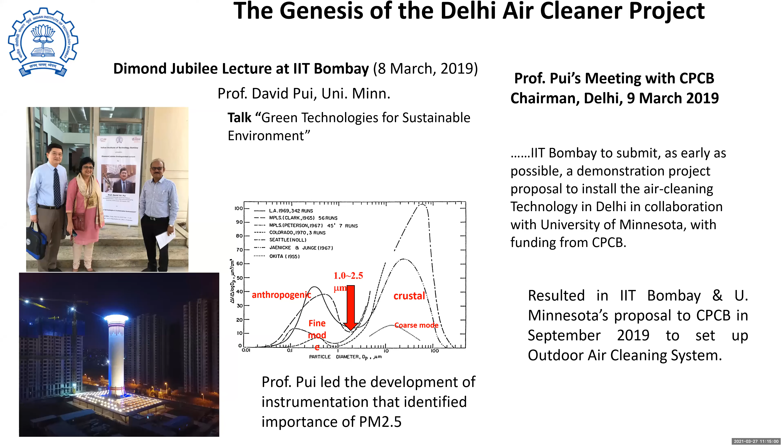To understand how this project actually came about: it started in March 2019 when IIT Bombay invited Professor David Pui of University of Minnesota. He is a long time worker in the area of aerosols and fine particles, and one of the co-founders of the particle sizing instrument, which resulted in the concept of PM 2.5. He gave a lecture on green technologies for sustainable environment, having been the architect of the tower set up in China, the Xi'an Tower, a 60-meter high tower in the city of Xi'an, which was published in journals.

This initiation led to our interaction with them and the setting up of the tower. After his presentation, he met the chief of Central Pollution Control Board, where it was indicated that IIT Bombay and Minnesota should go ahead and set up a proposal for examining the feasibility of setting up a tower in Delhi.

The basic rationale for it comes from the deteriorating air quality in our Indian cities. In fact, it is said that 49 of the 50 most polluted cities are in Asia. If you see the pollution level in Delhi over the past few years, even the annual average has been well above, a factor of 2 more than the annual permissible limit.

There is, of course, a very big Indian indoor pollution problem, which we are not addressing here because it comes under a separate category of strategies and technologies. A typical rural Indian household is full of smoke, and this also has to be addressed as part of improving the health conditions of the population.

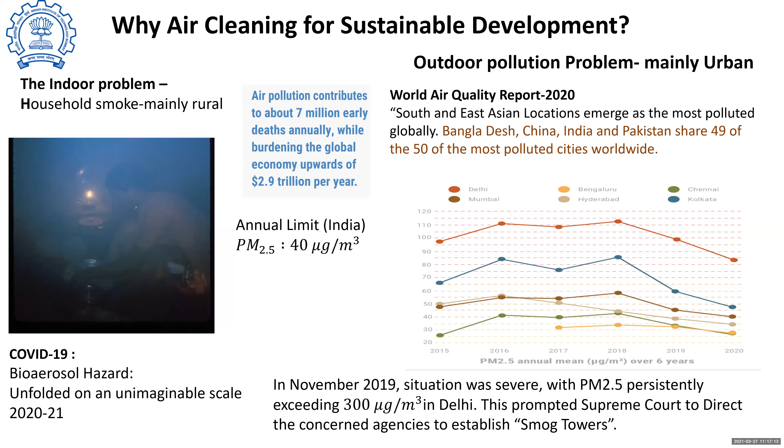It was in 2019 when the Delhi pollution was severe. The Supreme Court was seized with the issue, and directed the concerned agencies to establish smog towers, based on the proposal made by IIT Bombay. It was at that point that this project took off, and a team was formed. Tata Projects Limited agreed to be part of this project for installing the tower, and underwent several discussions with the University of Minnesota, and a final proposal was put up.

So in summary, this collaboration has resulted in a project which introduces outdoor air cleaning as a concept in India for the first time. It's a paradigm shifting concept. However, we must have a perspective that this is not for cleaning the cities - cleaning the city is a different concept. This is to create clean air zones in areas where people confluence, where there is a large density of population.

The choice of the facility is in terms of scale and type. It's a medium scale PM 2.5 removal device based on a tower of 20 meters height. It uses the principle of filtration driven by fans, with a clean air delivery rate of the order of 1,000 meter cube per second. It is a multi-institutional collaboration involving Tata Projects, IIT Bombay, IIT Delhi, University of Minnesota, funded by Central Pollution Control Board as well as the Delhi Pollution Control Committee.

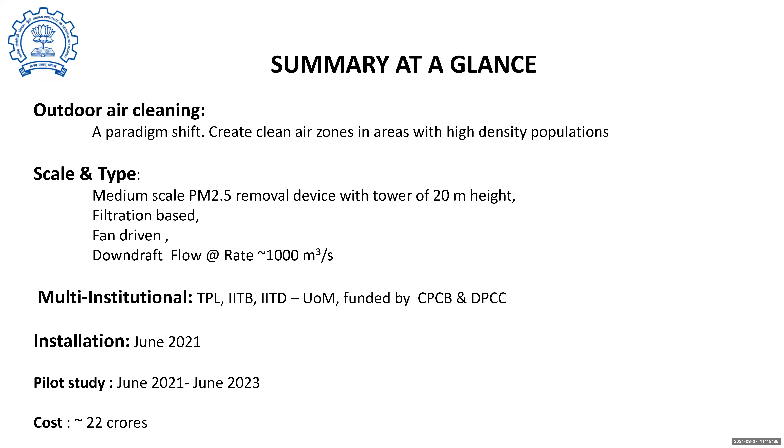It is expected to be installed by June 2021. After that, a pilot study of its impact will be conducted by IIT Bombay between June 2021 and June 2023, at a cost of approximately 22 crores.

Now, why concern for PM 2.5? PM 2.5 is basically particulate mass concentration contained in sizes below 2.5 micrometers. It is not particles of size 2.5, but all particles below 2.5, because the anthropogenic aerosols or pollutants created cover a very wide spectrum.

And why importance on this 2.5? Well, 2.5 is approximately a size below which a large fraction of the aerosols deposit in the lung. Its clinical, physical reason is the lung deposition model, shown here, where there is a peaking of deposition in the alveolar and tracheobronchial region at 2.5 micrometers and below.

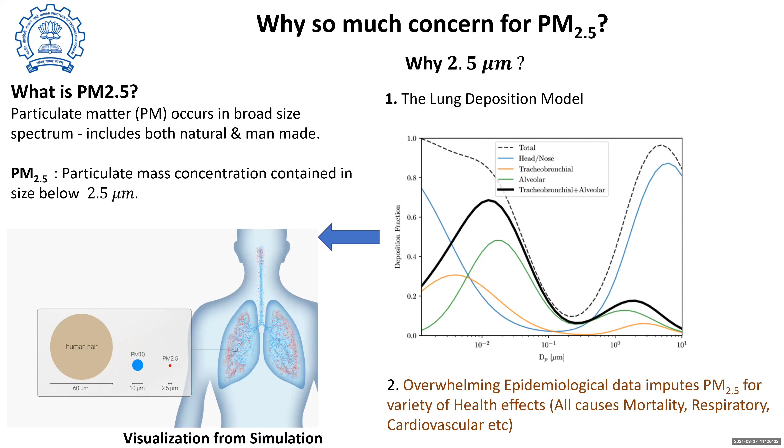That is one reason. And the second reason is the fact that there exists overwhelming epidemiological data which imputes PM 2.5, and not larger particles, for a variety of health effects. And this is a very strong and compelling reason for regulating and controlling PM 2.5.

As seen in this figure, you can see the red dots are PM 2.5 particles. This is a simulation result which shows predominant deposition occurs in the pulmonary region.

However, where do air cleaning systems stand among the various control strategies one should adopt? If you look at the ultimate solution, it is actually source and emission control and regulatory enforcement and compliance. However, such regulations may take a long time, especially in countries like India. So there must be some alternative mix of strategies as techno paradigms.

And this is where large-scale technologies could be introduced as a concept, as specific solutions for severity reduction among a mixed bag of portfolio of strategies. This is not the only strategy, but should be explored necessarily.

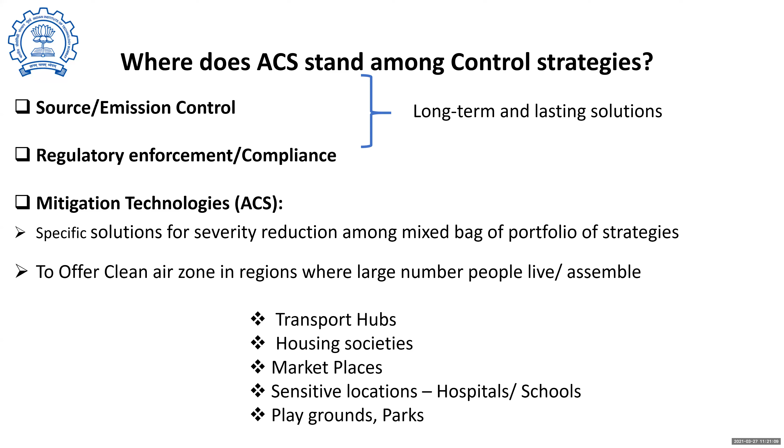And to offer clean air zones in regions where large numbers of people live or assemble, such as transport hubs, housing societies, marketplaces, sensitive locations involving hospitals and schools, playgrounds, parks, you can actually optimize the places where one would like to deploy such large-scale technologies.

So what are the concepts or principles which you use? Generally,

particles have very different removal mechanisms as compared to gases. Simple exchange of science doesn't work. It involves various principles such as inertial impaction, governed by Stokes number, diffusion governed by Schmidt number, gravitational sedimentation, interception, and artificially induced electrical attraction.

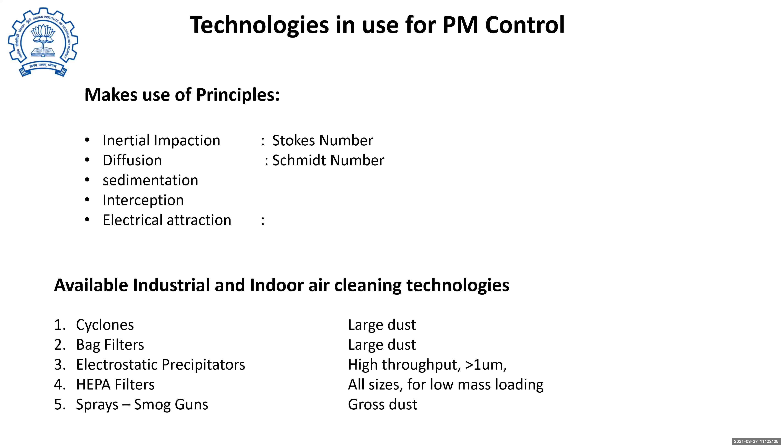And all these principles are utilized in existing industrial units such as cyclones, bag filters, electrostatic precipitators, the well-known high-efficiency particulate air, that is HEPA filtration system, and also sprays and smog guns. And they have different ranges and different concentrations at which they are useful.

However, HEPA filter is one system which is useful across all size ranges. And that is why filtration is a guarantor of removal, whereas others have ranges.

And a filtration system can be so designed that its least efficient collection efficiency itself can be made more than 99%. This is achieved by a combination of the matrix as well as the geometrical arrangement, such as pleating

of the filters. The figure on the right side shows the amount of dust collected, for example, in the Xi'an Tower. It can hold very large dust capacities.

And the figure shows the collection efficiency graph. This is typical, where the lowest efficiency can be more than 90%, for example.

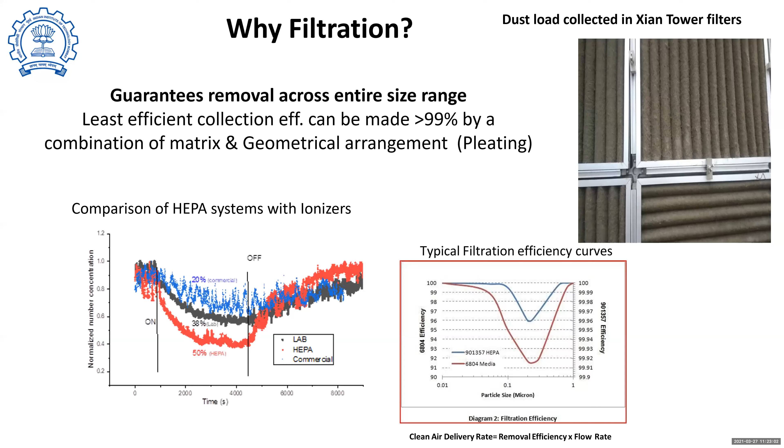And if you compare the various air cleaner technologies, indoor technologies, you can see from the red plot here that the filter-based systems always work the best and they have the highest removal rates.

In addition to the conventional filter, one can impart electrostatic charges at the stage of manufacturing of the filter fibers. These are called charged fiber filters, specially designed. They have a very high dust holding capacity.

When we say it is of MERV 14, MERV is the minimum efficiency reporting value, and a rating of 14 is actually an index. Higher the number, more efficient it is. So MERV 14 is typically useful in all indoor air cleaning devices.

And the kind of filters that one would require for an outdoor air cleaner is phenomenal. You need about 9,600 filters for a medium scale device, covering an area of 16,000 meters square by pleating, and it can hold up to about 80 or even more grams per meter square dust capacity.

You see, they are extremely porous. Unlike water filters, they are only 7% solidity, but still they collect with more than 90% efficiency.

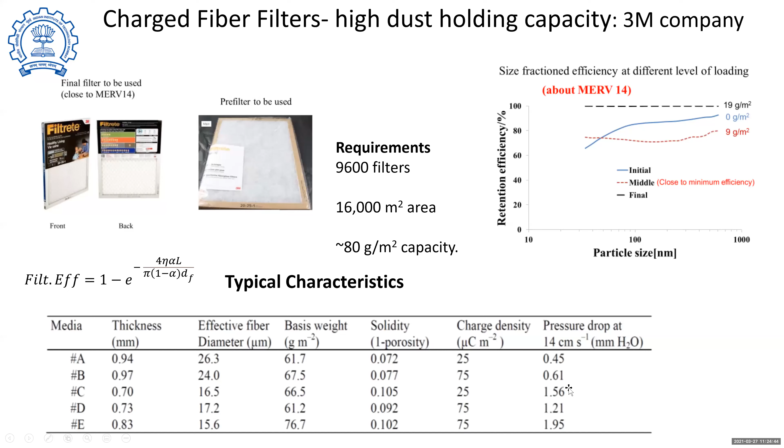And most importantly, they're very, very low pressure drop systems because of the high porosity, and they have less than a millimeter level of water pressure drop under typical operating conditions.

Now, having introduced the filters as the mechanism of trapping particles, one has to consider several factors for scaling and the type of air cleaner required.

There are questions like the Xi'an tower, which is considered an updraft unit where air is released at the top. So whether we should go for updraft versus downdraft, we should note that top release will not be effective in the vicinity of air cleaner systems. So in populous cities where one would first like to clean the areas around the tower, this may not be very useful.

Also it is difficult to evaluate the performance as the estimate of its range is very difficult. Considering all this, an option was made to choose the downdraft with ground level release systems.

Then there is a question of the energy that will drive the flows, whether solar energy buoyancy driven versus fan driven. The Xi'an unit is actually solar energy driven, so there is no cost of operation. However, the buoyancy driven system, while energy efficient, is highly uncertain, especially during winter or night times when you need to drive significant air flow, then it may not be operating at all.

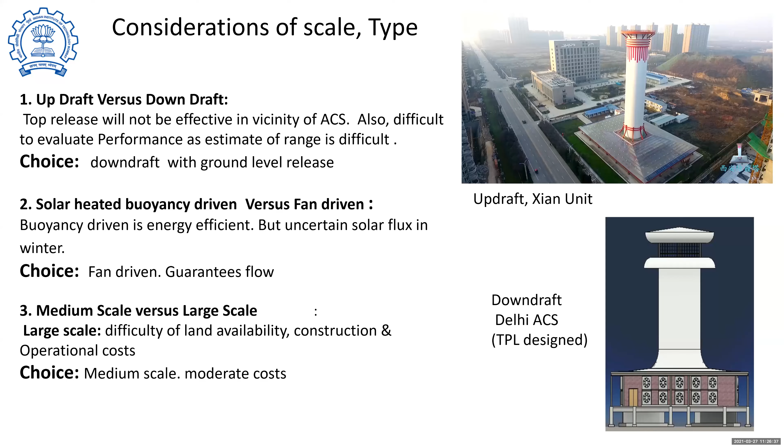So to be very definite, as a first venture, it was decided to go for fan driven systems because it guarantees flow. Then there's the question of scale, whether medium or large, considering the difficulty of land availability, construction and operational costs. Being a first-time venture, it was decided to go for a medium scale at moderate costs. The figure at the bottom is the TPL designed tower that is going to be installed. Much more you will hear from TPL itself on this tower.

Now, how do we measure or rate an air cleaner? How do we say this air cleaner is relatively better, as per design, compared to another? The quantity of technical importance is called the Clean Air Delivery Rate, which has the unit of flow rate, meter cube per hour.

However, it is not just the flow rate. It is the product of the air flow rate and the particulate matter removal efficiency. This concept was developed by the Association of Home Appliance Manufacturers, basically to qualify indoor air purifiers. We believe the same concept is applicable and useful even for outdoor air purifiers. So when somebody says he has a technology for outdoor air cleaning, the first question one should ask is, what is your CADR? If particle removal efficiency is 0, even if you have very high flow, it's not effective, so the CADR is said to be 0.

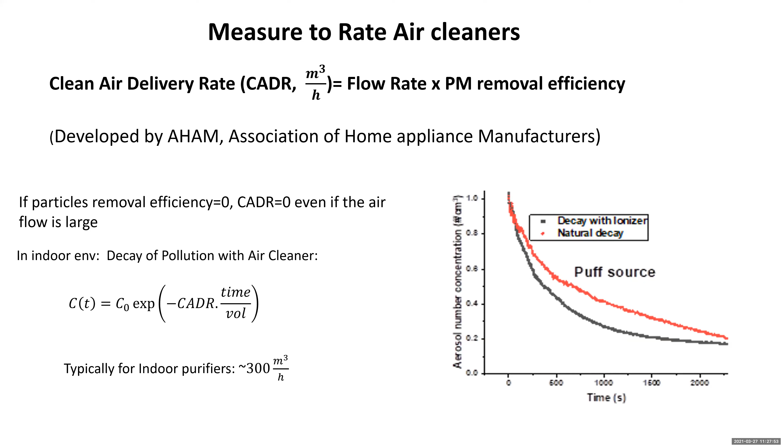CADR has an application in the indoor concept because it is actually the rate constant of decay. So if you estimate the rate constant experimentally, you can determine the CADR from the decay characteristics. However, in the outdoor concept, it cannot be done this way. You have to calculate it by multiplying the flow rate by the intrinsic efficiency. Typically, indoor air purifiers have a low CADR, about 300 meter cube per hour, which is very small compared to what we would require for outdoor use.

So how do we decide what level of outdoor air CADR is required? For this, we did a certain level of first principle simulation on an idealized terrain, just to get an estimate. You can model airflow in the outer environment by considering dispersion and fluid flow as a simple flow, without actually using the Navier-Stokes equation. One can get certain solutions by dispersion theory.

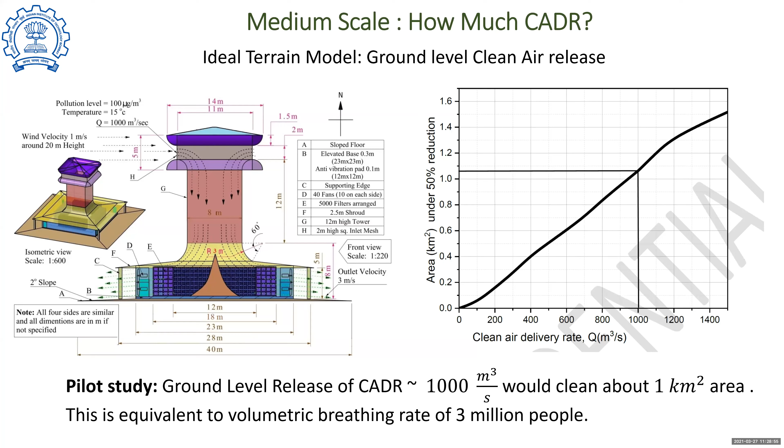That estimate was used, which says that if you go for a medium scale area of about 1 kilometer square for cleaning, you would need a clean air delivery rate of the order of 1,000 meter cube per second. This is actually the underlying reason one chooses a flow of the order of 1,000 meter cube per second at a collection or removal efficiency of about 90% or so. So the tower was designed with those parameters in mind, and you will hear more about the tower dimensions later.

Now, having understood the basis for the choice of the air cleaning system being built at both Anand Vihar and Connaught Place, certain intrinsic characteristics are worth understanding. What level of pressure drops are involved? Because we have to design fans for drawing that much air, and fans operate on pressure drops.

So one needs a certain level of calculations, which has been done by University of Minnesota, and we have been able to reproduce these calculations also. You can compute the pressure drops at various stages of the tower, starting with its opening at bell mouth to the level of discharge at the fan bottom level, and the estimate is about 280 pascals, about an inch of water. With all margins, the fans have to be chosen as to deliver 1000 meter cube per second across a pressure drop of about 373 pascals.

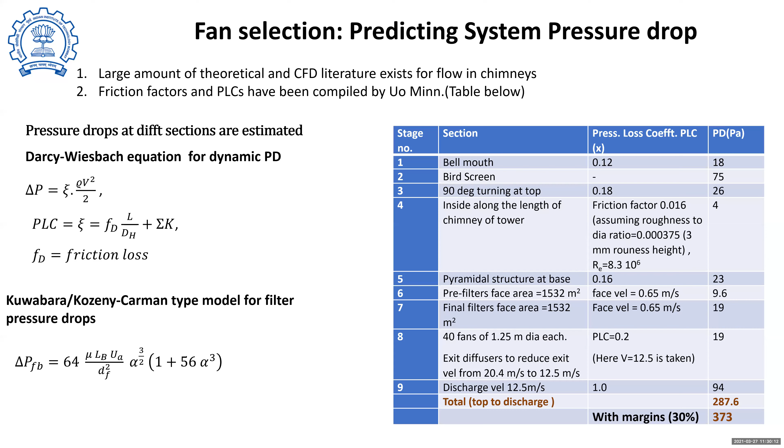The theoretics is given here, basically very standard pressure loss coefficient based calculations with certain porous media models for filters. So an operational estimate is that if you start with 1000 meter cube per second at a certain pollutant load level of, let's say, 350 microgram per meter cube in winter and about 150 microgram per meter cube in other seasons, at about 50 to 70% RH.

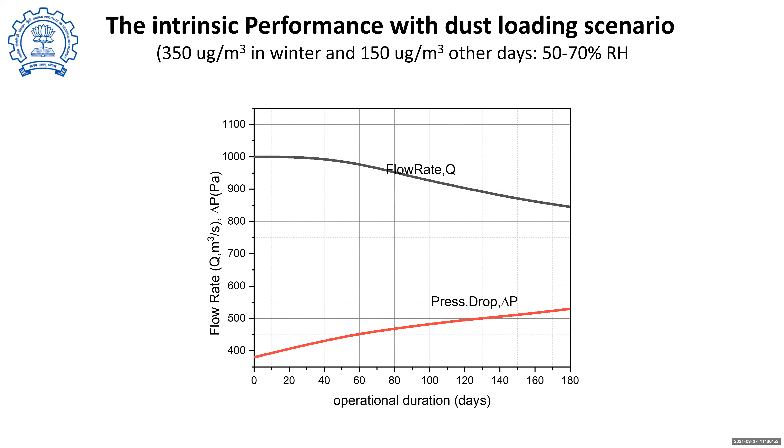And if you operate over a period of 6 months, you would have a certain marginal drop in performance. From 1000, it may come to about 850 meter cube per second, and the pressure drop also is going to build up. So these kinds of considerations are the ones on which the replacement strategies have to be evolved.

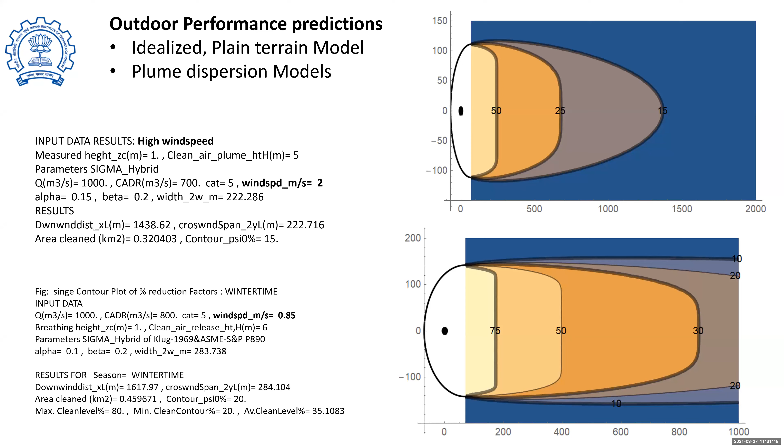This will be mentioned more by Dr. Sahu. The simple theoretics also tells us that this is a feasible technology. It can give you at least 500 meter cleaning at about 25% level at moderate as well as winter type wind conditions. But of course, this is only an ideal feasibility estimate. The real theoretics will be based on the CFD models, which will be mentioned soon.

So to sum up the background, the present study is only a beginning. In the near future, design-based improvement is absolutely necessary, and this improvement should be in the scale, in the combination of ideas, which involves maybe filters and other concepts, cost and efficiency optimization. All these have to be explored. So this is actually a beginning to develop more R&D on this subject.

Right now we have really achieved a capacity building experience. We have perhaps the best known university on air pollution technologies tied up with us. We have the best team involving Tata Projects Limited, and it's an excellent private-public partnership venture.

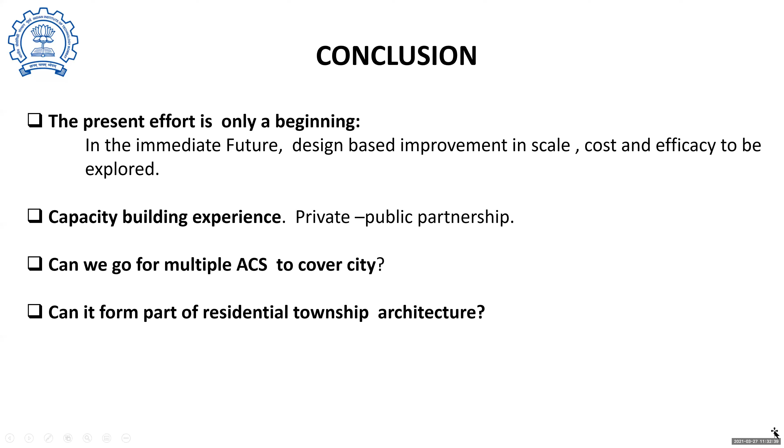However, there are questions that this has prompted. This question has been asked by the Supreme Court also. Can we go for multiple air cleaning systems to cover the city? Can you calculate how many towers would be required? Whether such questions are meaningful or not needs to be debated among the community, and such debate, this project creates. And can this form part of residential township architecture, for example, like many other architectures have clean air delivery devices? So these are some important food for thought for the future.

I thank all of you for listening to this, my talk. Thank you.

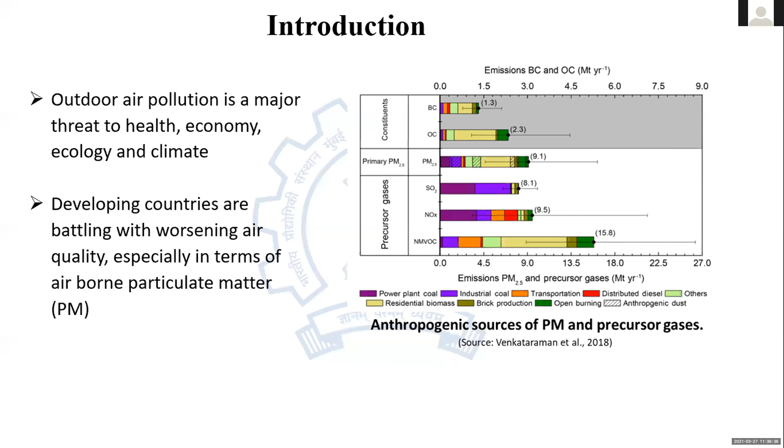The right-hand figure I am showing here shows the air pollution coming from different sources. The color codes indicate the pollution sources: power plant, industrial coal, transportation, distributed diesel, residential biomass, brick production, and many more sources are present. But we can see the major sources are coming from power plant, industrial coal, residential biomass, and so on. So there are various levels of impact from different sources depending on where the receptor is.

Okay, and Professor Maya already discussed some of these things. So I'm going to outline here the different control strategies we adopt for air pollution control. One important aspect is source control. Source control means the place where the pollutants are emitted. For example, you have a power plant where you are burning coal to generate energy, and there you can change the fuel and raw materials, you can change the emissions. Similarly, you can change or eliminate the process steps which are essential for producing these pollutants. This is one of the most effective approaches.

And the second approach is air quality regulations. Air quality regulations basically means putting strict regulations on industries and various operations so that they have to limit their emissions of pollutants to the atmosphere.

And the third important aspect here is basically end-of-pipe control treatment. This means installing control devices in the power plant or facility before emissions are released to the atmosphere. That is called end-of-pipe control treatment. Professor Maya discussed various types of instruments available, devices such as filtration, ESP, gravity settlers, and many more. Then once the particulate matter or pollutants come out to the atmosphere, how do we want to control it?

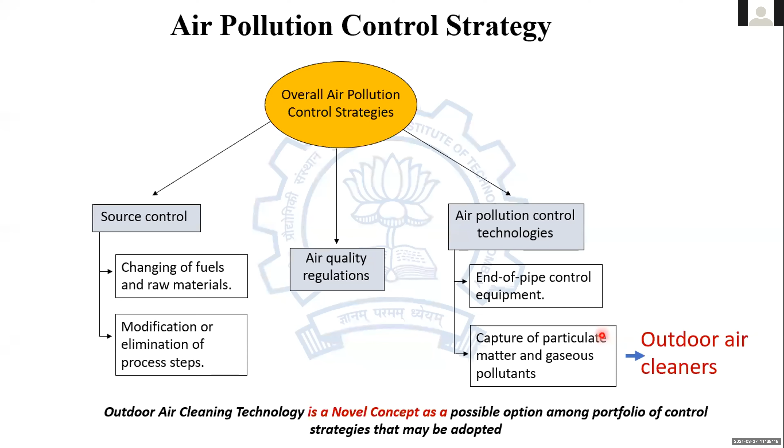This is where the outdoor air cleaning system comes into picture. This outdoor air cleaning system is a very novel concept, a possible option among the various portfolio of control strategies that can be adopted to solve urban air pollution. Again, we are saying that this outdoor air cleaning system is the first of its kind we are installing in India. And it represents a techno-strategic paradigm shift from the current technology available.

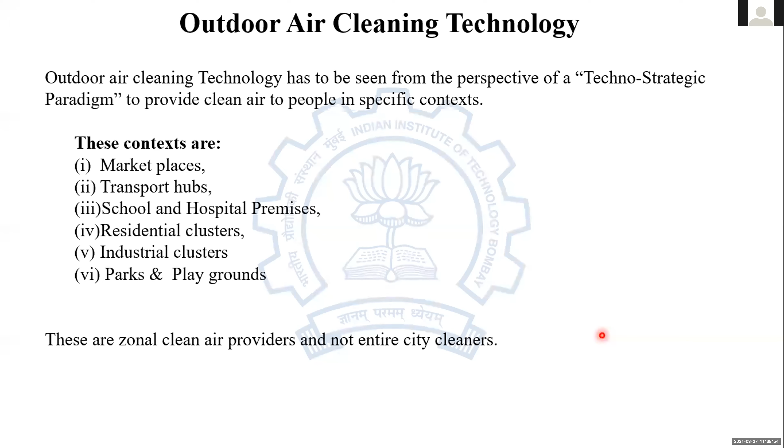And we are looking in the context of how we can provide zonal clean air to marketplaces, transportation hubs, schools, hospital premises, residential clusters, industrial clusters, parks or playgrounds. These are not envisioned to be complete city cleaners.

And this is the schematic of the upcoming air cleaner system at Delhi, which is going to be installed at 2 places: Anand Vihar and Connaught Place. These are funded by 2 different funding agencies: Central Pollution Control Board and Delhi Pollution Control Committee.

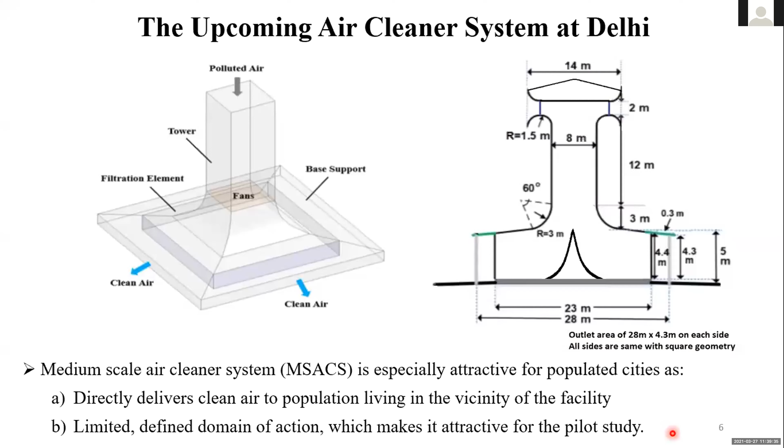And again, we want to highlight here that it delivers clean air to a population living in the vicinity of the facility, within a limited defined domain of action, which makes it attractive for the pilot study. It is not going to clean the entire Delhi, but we are going to determine as part of this study how much area it can impact.

This is based on the principle of filtration. The basic mechanism here is that polluted air is sucked from the top of the tower, passes through a filter assembly where it is trapped, driven by fans, and clean air is delivered into the breathing zone. After the clean air comes out at a certain velocity, we try to estimate how much area it can clean.

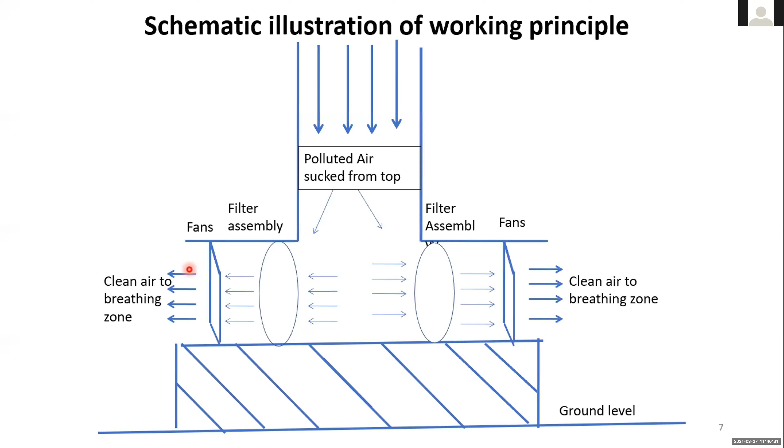As Professor Maya discussed, the filter system is the heart of the system. It has to be a specially designed filter so that we do not have to replace it immediately, time to time. It is an electrostatic based filtration system.

There are two important aspects of this filtration system. One is called the pre-filter, which captures particulate matter larger than 10 micrometers—much bigger particles are captured there before it goes to the second filter, called the fine filter, which captures particles down to several nanometers, including PM 2.5.

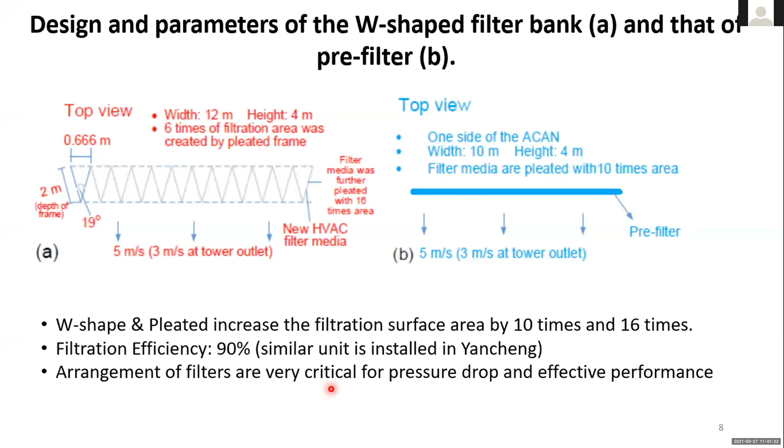These are specially designed filters, and the special arrangement of the filter is very important from a performance point of view. These are W-shape pleated to increase the filtration area by 10 to 16 times, and filtration efficiency is expected at 90%. So the arrangement and design of the filter assembly has been very critical for performance delivery.

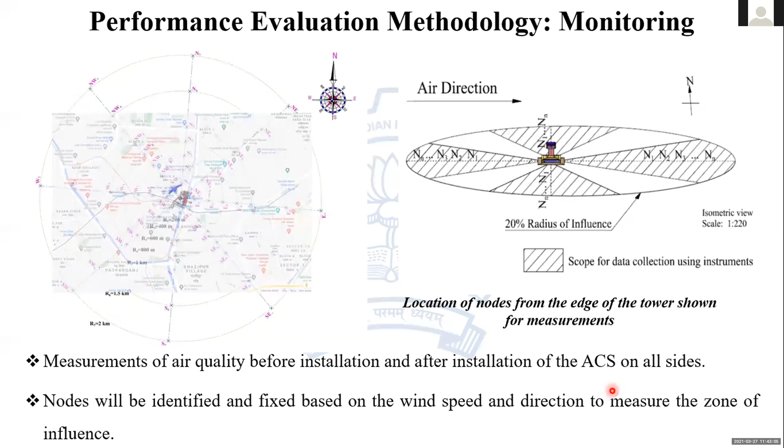Measurements of air quality will be done before and after installation of the cleaning system on all 4 sides. The system will then be operated under various different operating scenarios so we can evaluate performance at different times under different conditions.

These are some very high-end quality instruments. This is called the scanning mobility particle sizer, which can measure size distribution down to very few nanometers, coming from different sources like traffic or other high combustion sources.

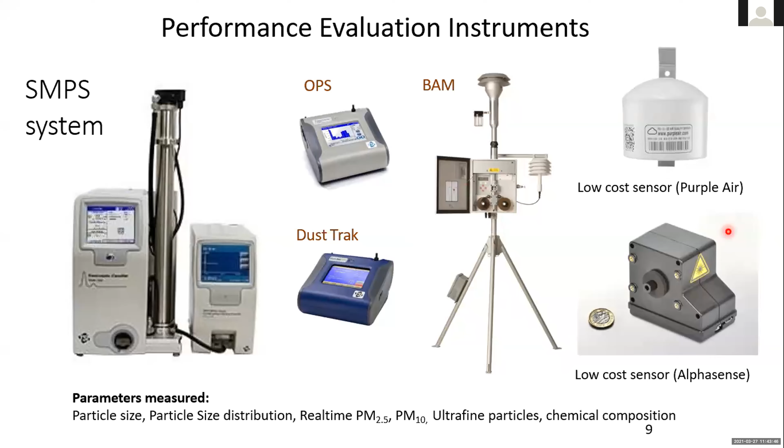We also have DustTrak and BAM instruments—these are portable and will be operated around the tower so we can move around and measure performance. We'll also deploy a network of low-cost sensors around the tower to continuously measure particulate matter performance.

Over a period of time, based on these measurements, we can optimize the operation of the tower. We also have a real-time data acquisition system that will be deployed so we can understand live what the particulate matter levels are and what the performance of the tower is.

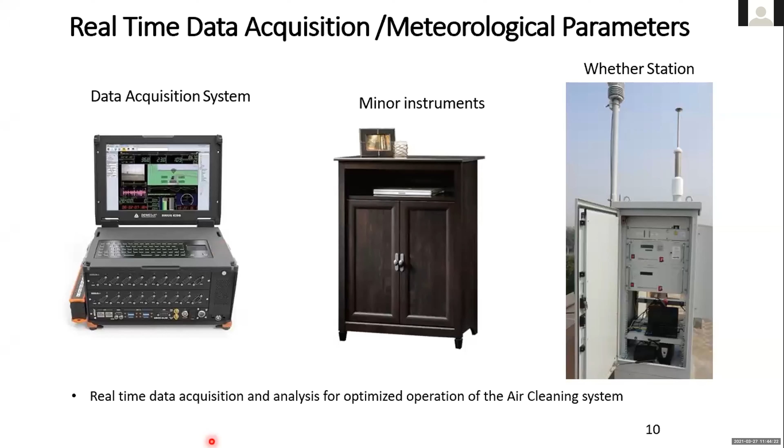At the same time, we are also deploying a weather station to understand the meteorology of the area—wind direction, wind speed, relative humidity, temperature, and many other parameters. So real-time data acquisition and analysis will be done.

So in this case, the second thing is we want to do the modeling to understand exactly what we are going to predict.

Your voice is broken. Hello, Manoranjan sir, I think we are not able to hear you. Sir, can you please rejoin, you might be facing some network issues, therefore this is occurring.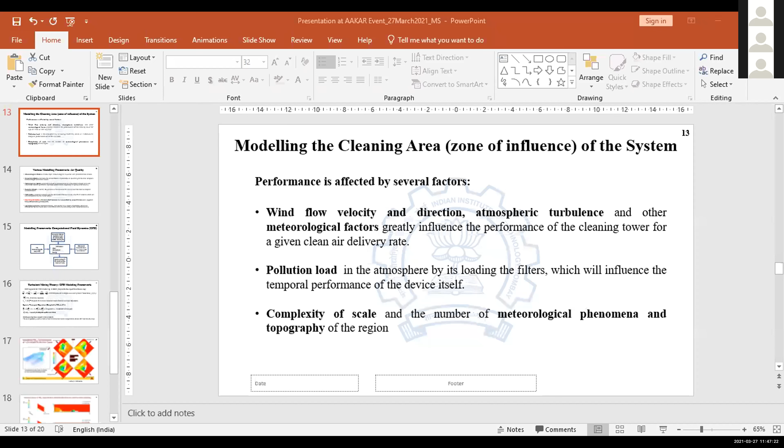Manoranjan sir, hello, is here. I'm back, can I finish in a couple of minutes only? Okay, no issues, you can go on with your presentation. There is a little issue. No issues sir, we understand, you can go on with the presentation. That would be great. Is the slides visible? Hello? Yes sir, yes sir, they are visible.

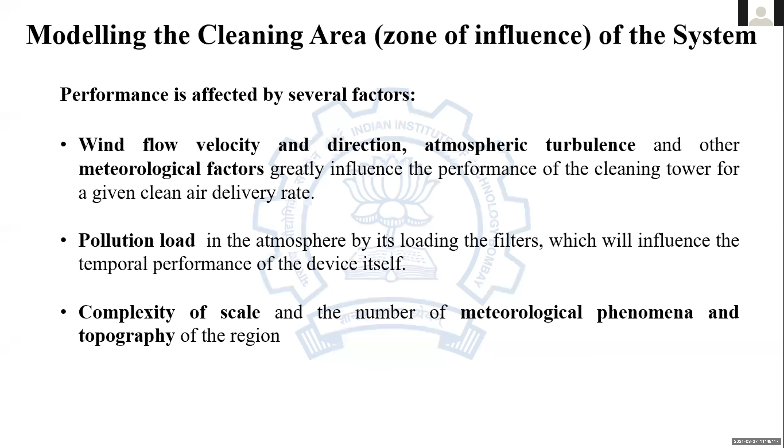We discussed a little bit about various instruments we are deploying, and now we are doing the modeling to determine the cleaning area around the system. The performance is affected by various factors such as wind flow, velocity, direction, atmospheric turbulence, meteorological parameters, and pollution load in the atmosphere, because the pollution load changes from season to season, different times of day, and different weeks. There's also the complexity of the scale and number of meteorological parameters, phenomena, and topography of the region. Topography means you have various buildings around the system and various industries around the system. All this complexity has to be taken into consideration while evaluating the performance.

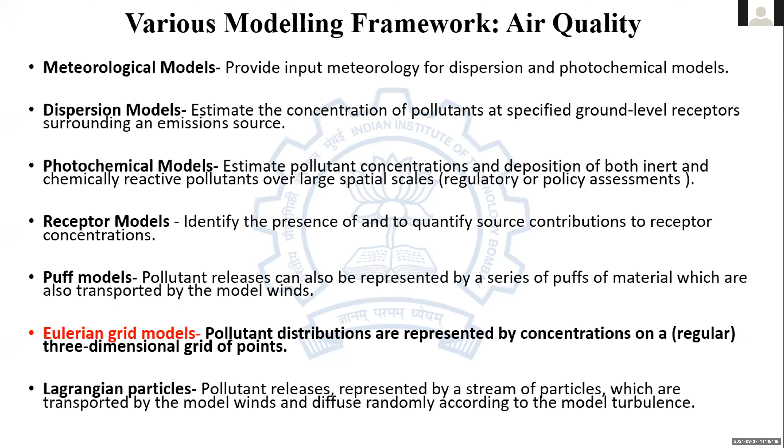In the air quality domain, there are various types of models available, such as meteorological models and dispersion models. All these different models are available, but considering the situation of the system, none of these models are applicable. Because this is a first of a kind system, we are trying to go for a Eulerian grid-based model based on computational fluid dynamics, which can take into account the fluid flow at different grids and estimate the pollutants. So we are taking a very advanced numerical approach with computational fluid dynamics, in which we are solving the mass, momentum, and energy equations.

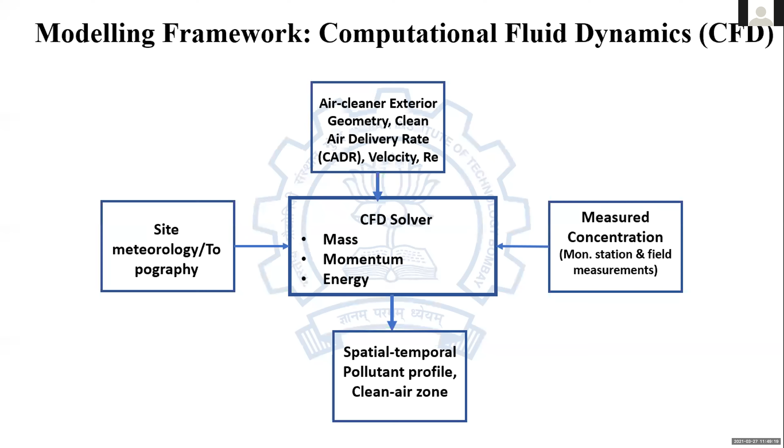The input to this solver is basically the air cleaning tower's exterior geometry, clean air delivery rate, velocity, meteorology, topography, and measured concentration. Finally, we are estimating the spatial and temporal pollutant profile and determining the clean air zone. This is some of the mathematical framework behind it - the Navier-Stokes equation provides the velocity profile at different grids around the tower. The velocity profile derived from this equation is then input to the species transport equation, which is an advection-diffusion transport equation used to determine the concentration profile around the tower.

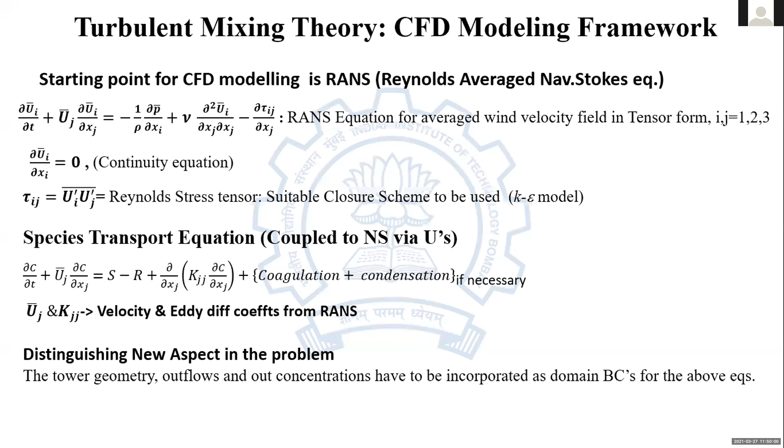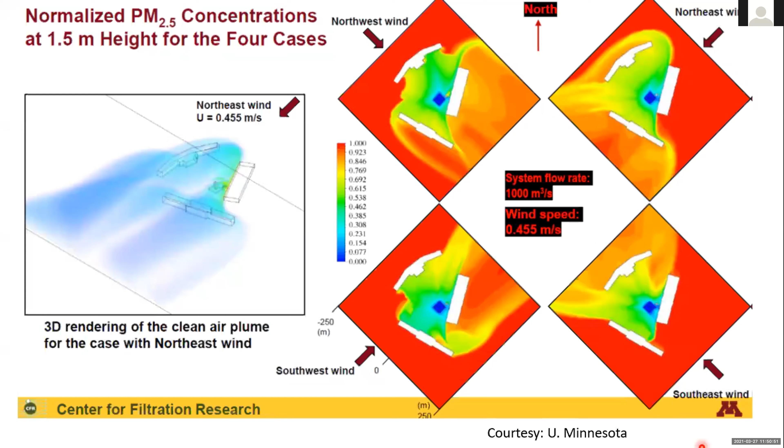Other different colors here, you can see the yellow and the green. Then the blue is the most cleaning area. So that means under different wind direction, you can see different amounts of performance, different amounts of cleaning can happen. Based on the wind direction, you can clearly see that in the significant wind direction, the cleaning area expected is significantly higher, and you can see the plume of the air.

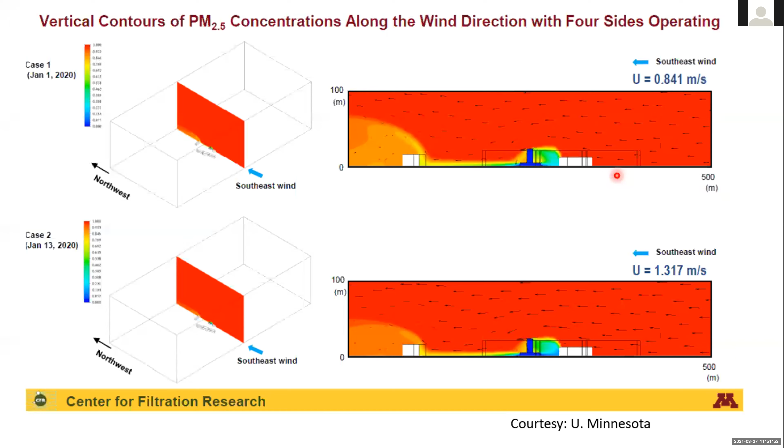Much more work is ongoing to understand the optimized operation of the tower, and the tower is going to be commissioned in June. After that, we're going to get the real-time information which will be used in the model to validate the model. Then it can be used for estimating optimized operation of the tower, as well as for estimating the number of towers that may be required to clean entire Delhi, or if we want to put a new system in a different place, how we have to design a system so that it can be very, very effective.

With this, I want to summarize my talk. A medium-scale air cleaning system is envisioned to reduce particulate matter pollution, and it is an interdisciplinary collaborative project between University of Minnesota, Tata Projects Limited, and IIT Bombay. Performance monitoring will be done by deploying various high-quality PM measuring instruments. Numerical simulations such as computational fluid dynamics are undergoing and will be validated with actual measurements for its operation optimization. This study will provide a benchmark developmental tool for future technologies and help in selecting suitable systems and number of smoke towers for a given region and zone.

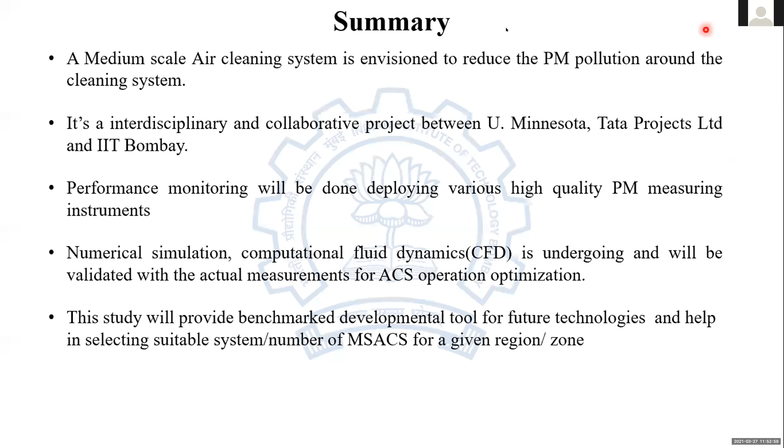Yes. Whether my screen is visible? Yeah, yes sir, your screen is totally visible.

Good morning all, and thank you to the organizer for giving us the opportunity to explain about this project. This is one of the very exciting projects we are involved in, not in terms of its value or volume, but in terms of its importance to society and to the current burning problem of air pollution.

Okay, so. One second, sir, one second.

So I will tell about the project brief, background, development of technology, design and 3D models, site photographs, and rendered view. Thank you, Dr. Mayya and Dr. Sahu, for explaining the principles of this project and the scientific background of this. My talk will be based on how Tata Project is involved and implemented this project to a reality.

If you see the project, it is a medium scale air cleaning system, and our client is Central Pollution Control Board and Delhi Pollution Control Committee. Central CPCB is in charge of the tower at Anand Vihar in Delhi, and DPCC is in charge of the tower at Connaught Place, that is at Rajiv Chowk.

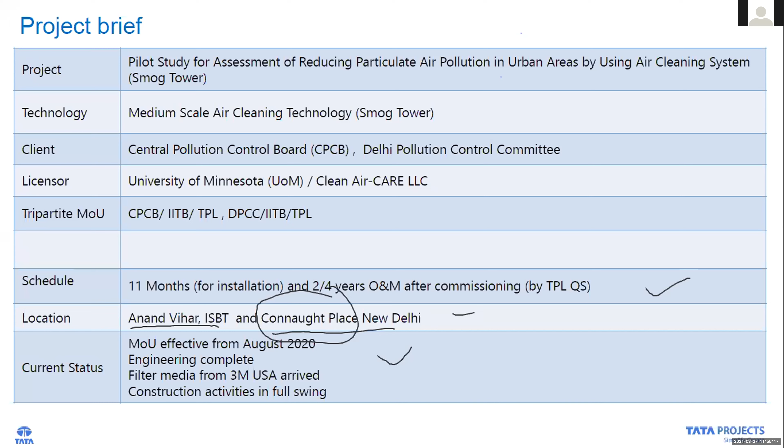The current status is that the engineering is complete. Filter media from 3M US arrived at the Mumbai port, and it is getting transported to the site, and the construction activities are in full swing.

So this is a very multifaceted project in terms of various stakeholders. They are doing various things, and all are coming under the umbrella of TPL to interface and integrate the whole thing and give the final product.

If you see IIT Bombay, they're responsible for identifying the suitable technology, technical guidance, field experiments. Once the tower is in operation, then the modeling and simulation to validate the data analysis, and the final report submission to our client, which is CPCB and DPCC.

Now in TPL, we are coordinating with University of Minnesota, and their licensed partner is Clean Air-CARE LLC. So they are giving us the basic engineering of the tower in terms of dimension and height, specification of fan, control philosophy, the flow instruments, the specification for the data acquisition, and the filter system and engineering.

From TPL side, we are doing the engineering, that is the tower detail drawing, plot plan, layout, foundation, office block, electric fans, load list, electrical design, transformer, switch gear, and the control system and data acquisition system.

The execution team is doing the normal execution like site preparation, survey, civil work, tower supply, fabrication, fans, erection, transformer, switch gear, power cabling, lighting, and the commissioning facility.

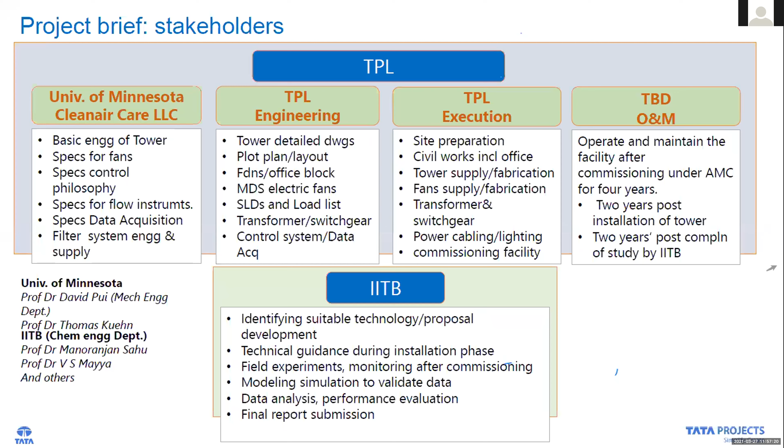Once it is in operation, there will be operation and maintenance issues, and that is to be decided. We have the capability to do the O&M also, but we are waiting for the client to confirm whether they want to do it themselves or assign the task to Tata Projects. So we can do the commissioning and maintain the whole facility for the next 4 years on an AMC basis.

If you see the program, it's a very fast track project, and from the date of MOU we have to complete the project and hand over, including commissioning, within 11 months. And it is monitored by the Supreme Court. If you search the net, you will find the Supreme Court is taking monthly and weekly reports, and they are currently satisfied with the progress.

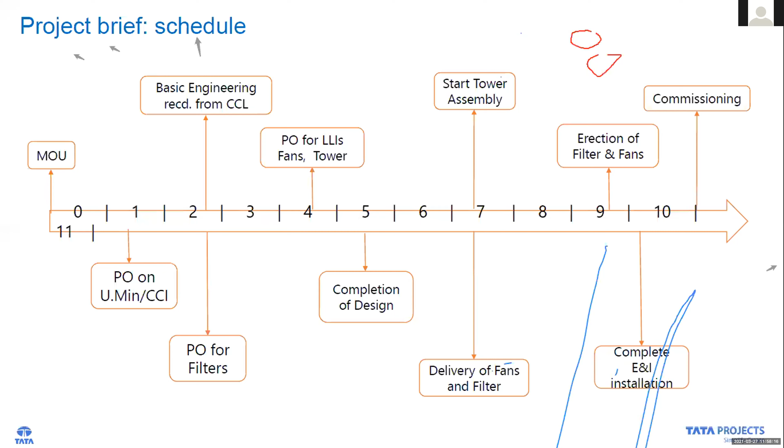So it starts from the memorandum of understanding, then the purchase order to University of Minnesota and CCL, then basic engineering and ordering the filter and fan, then completion of design in the 5th month, and start of tower assembly, delivery of fan and filter, and the erection of filter and fans. Currently we are in the 7th and 8th month kind of time, and we are more or less on progress. The commissioning will start between the 10th and 11th month.

So this is the site, you can see on top Anand Vihar, and at the bottom Connaught Place, before starting our project. In terms of the background, the first four points have already been explained in detail and very nicely by Dr. Mayya and Dr. Sahu, so I will start from the bottom, the fifth point.

The Supreme Court gave the order on 13 January 2020 for installation of the smog tower at Anand Vihar, and CPCB approved IITB's EOI and sanctioned the EPC fund on 28th January. CPCB has commissioned NBCC, National Building Construction Corporation, as their PMC, as the implementing agency and disbursing their funds. Air quality data will be monitored for 2 years after tower installation.

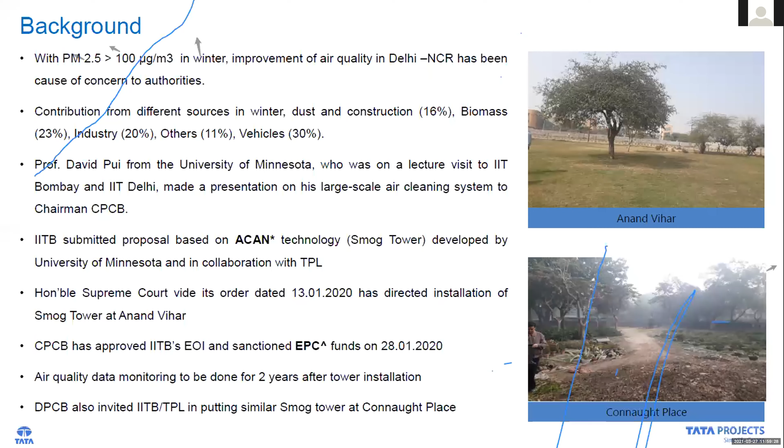DPCC, it's written slightly wrong — DPCC also invited IITB and TPL, and we are also constructing the tower for DPCC at Connaught Place.

The development of technology: a solar assisted large scale air cleaning system in Xi'an in 2016, then the second generation, a solar assisted large scale air cleaning system at Yancheng in 2017, and the third generation at Taiwan in 2018.

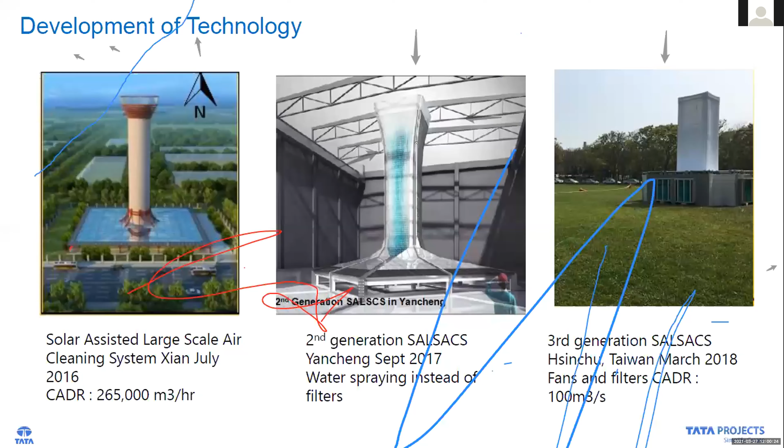I think there are some scratches coming on my screen, so I'm not able to see the text. It's a request to all attendees, please do not annotate. In the more option while sharing the screen, please click on more — there is an option to disable attendee annotation. If we find someone annotating, we'll kick them directly. So what do I need to do? Click on the more option while you're sharing, there is a horizontal tab of the Zoom while sharing.

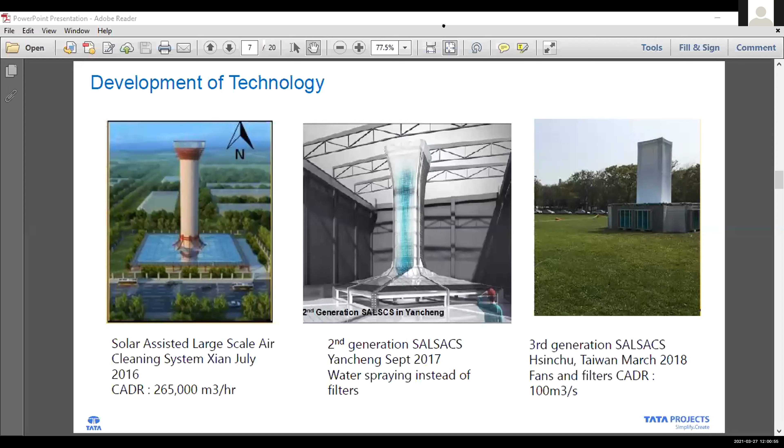Okay, so I'll stop sharing. Then it is sharing only for host. Can you share it now or not? Yes, I can share it now. Share the screen. You can share it. Is it visible now? Yeah.

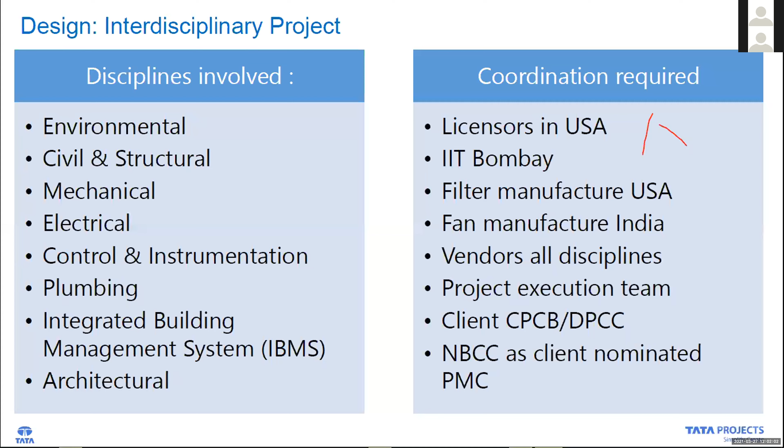On the right side, it is a huge amount of coordination and interface required between the licensors in the USA, which is the University of Minnesota and Clean Air Corporation, IIT Bombay, and also IIT Delhi is involved in some structural design approval and review. Then the filter manufacturer in USA is 3M, and we are procuring the material filter from 3M. Fan is from the FLACT group in India. There are various vendors like control and instrumentation data acquisition system, like Siemens and other companies. Then there is the project execution team, the client, and the client nominated PMC, which is NBCC.

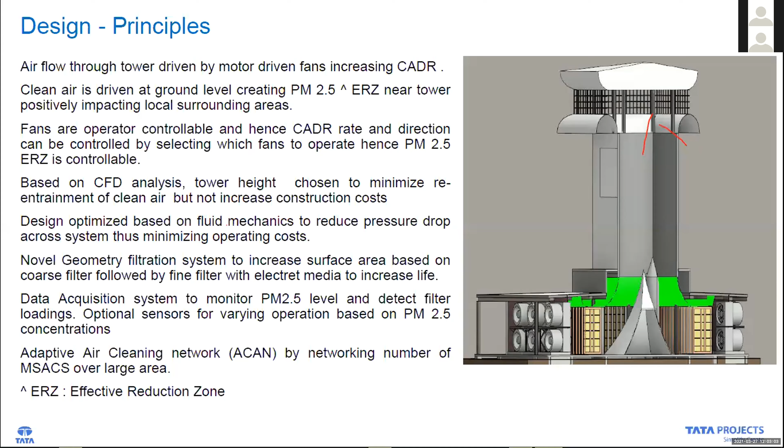So the design principle, again, this has been explained by Dr. Mayya and Dr. Sahu, so I would not repeat it here again.

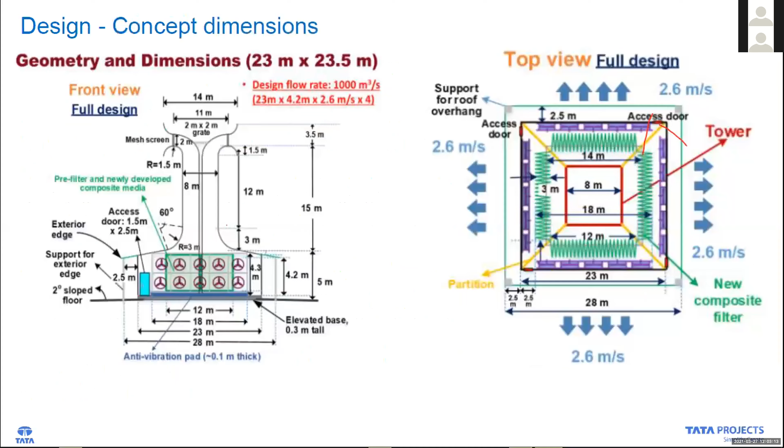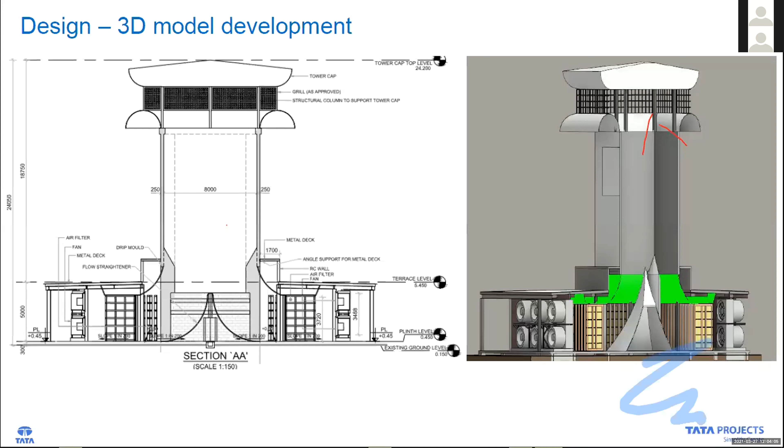So from the sketch which you have seen in this drawing, we have developed, through our engineering team, using various kinds of engineering software and tools, this farm design with various dimensions. On the left hand side, you can see a typical section. The central portion, the chimney kind of thing, is the tower, on top of which there is a tower cap and the grills. It's an 8 by 8 meter tower. Below the 8 by 8 meter tower, there is a sloped flow straightener which will direct the flow towards the filter. Once the filter bay is there, after that there is a bay of fans. On the right hand side you can see some 3D view, which I will show in my next slide.

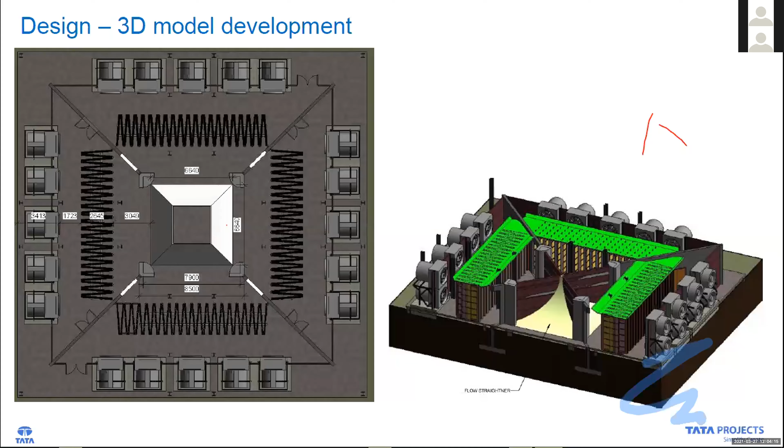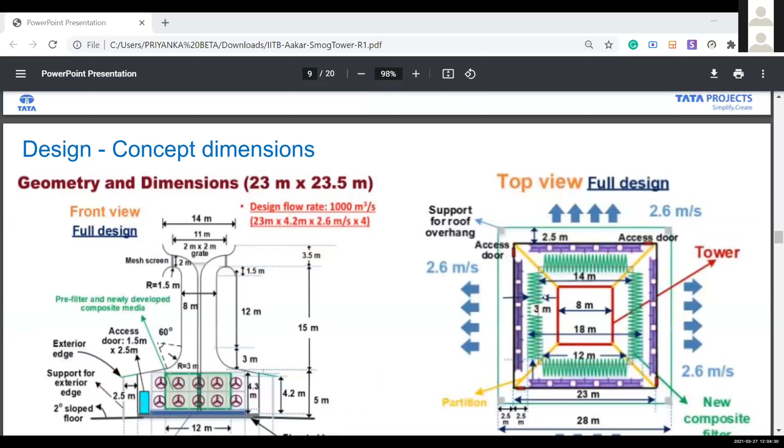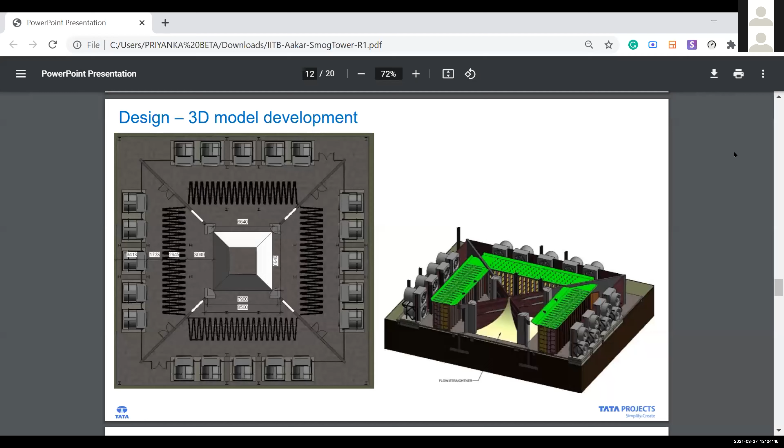Excuse me sir, what I suggest is I can share the screen on behalf of you so that the annotations are not made, because I can see some persons are still doing annotations. Is it visible? Is it visible sir? If you can go through the PowerPoint... it is the PDF. If you go to full screen, then... okay, I think it's good to go.

Okay, so we have developed a 3D model, and it is a very complex model because we need to satisfy the functional requirements of this project, in terms of the dimensions, internal dimensions, the smooth surface, the curvature, and all these things. On the left hand side you can see the central portion is the flow straightener, and outside these corrugated things are the filter bays. As the professors have mentioned, there is a primary filter and a final filter, and this filter itself is corrugated, and also the whole arrangement is corrugated, so that you get the maximum surface area. Once you come out from this filter, on the four sides you can see the fans. There are about 40 fans stacked, 5 in each level, so there are 2 levels, 5 on top of the other 5. And if you see, it's a very enclosed system.

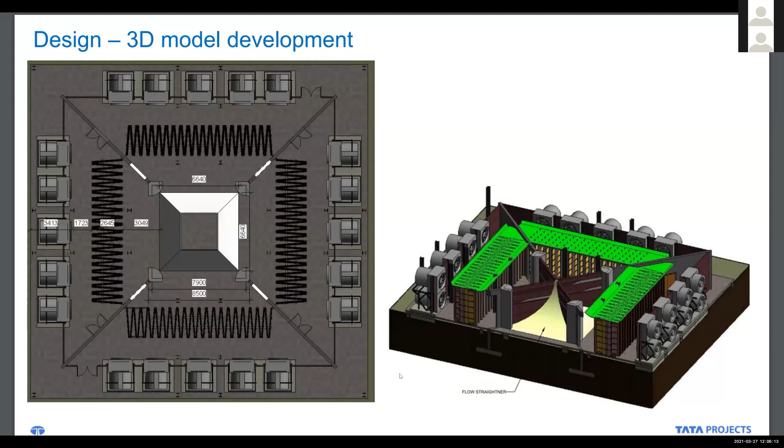So there are a lot of sliding doors, and the dimensions are maintained so that access is possible, because these filters need to be replaced or cleaned. There will be a lot of instruments and electrical equipment inside for maintenance purposes, and we also need to consider the heat generated and thermal monitoring. All these things will be there inside the tower base.

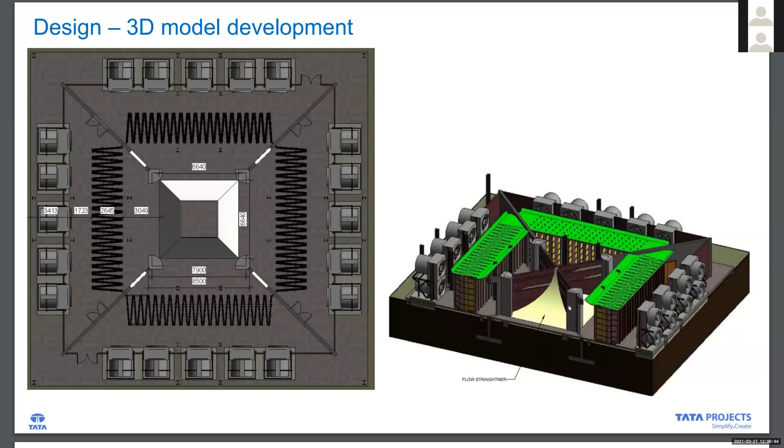On the right side, you can see the isometric view, with the 4 columns at the central portion. These 4 columns are supporting the tower. The air is flowing through the flow straightener, and it is coming to the filter, and it passes through the filter, and then the fan is actually sucking the air and throwing it out as clean air. So that's the principle. Next slide, please.

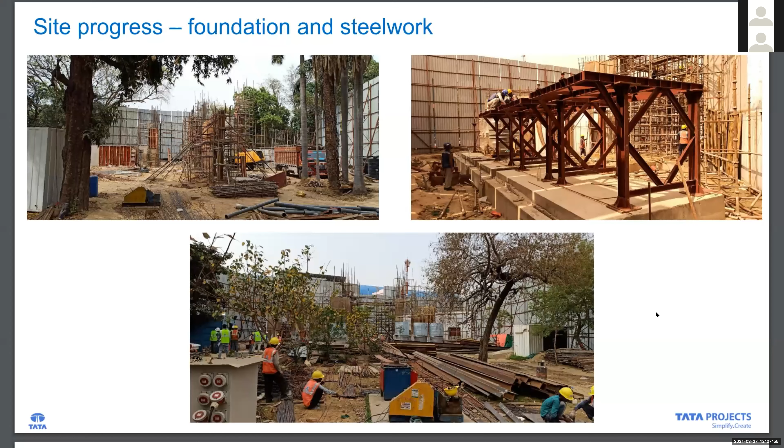Top right, you are seeing the fan assembly. These are the two racks - at the bottom there will be 5 fans, and on top of the steel frame there will be another 5 fans. That's only on one side; the same thing will be on all 4 sides. In the bottom middle portion, you can see the steelwork fabrication ongoing, because the bottom structure is supported by steel columns and steel roof.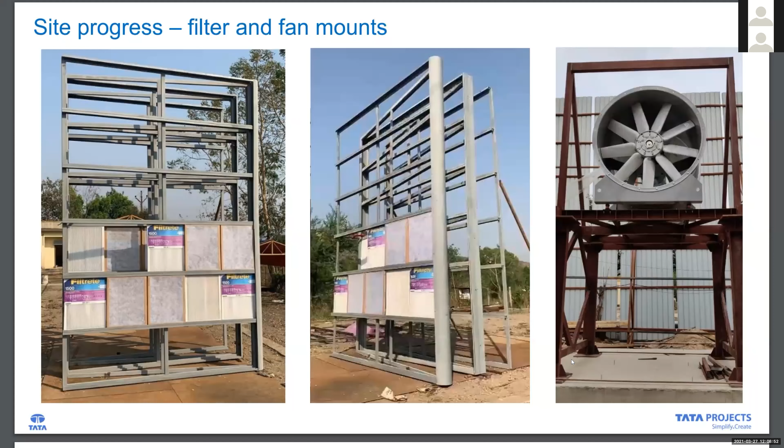On the right, we have received the fan delivered at site, and we have mounted one fan. Another fan will come at the bottom in the same way, and there will be a number of fans.

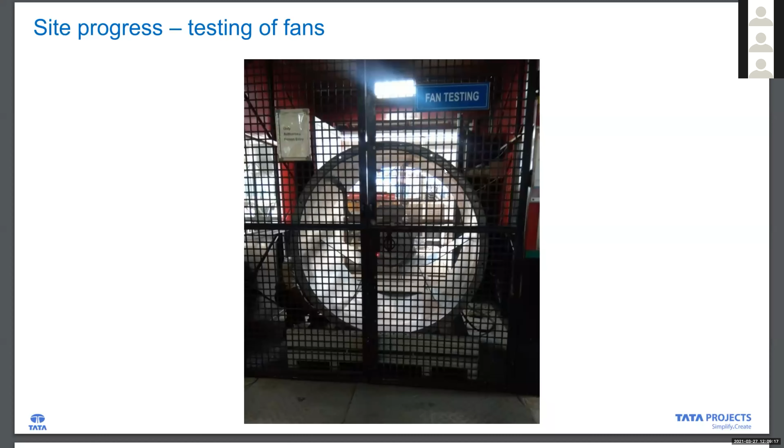Before the fan is delivered at site, we test it at the manufacturer's facility, checking it against design parameters in terms of airflow, heating, performance, and other quality features. There will also be a lot of attenuators to reduce the sound in front of the fan.

This tower is coming in the middle of very busy locations. It is at the heart of Anand Vihar, where you have the Anand Vihar main railway station, the elevated metro station, and construction going on for an underground metro station. On top of the underground metro station there will be a hotel and a commercial building. So three sides of this have a very populated transport hub: underground metro, elevated metro, office building, and Anand Vihar.

If you remember Dr. Sahu's presentation about the flow simulation model, you'll realize how important this is when it's in operation and all the metro station and other things are working, considering how many people will be visiting around. It will be a good example or location in terms of a pilot study to see the benefit it can give.

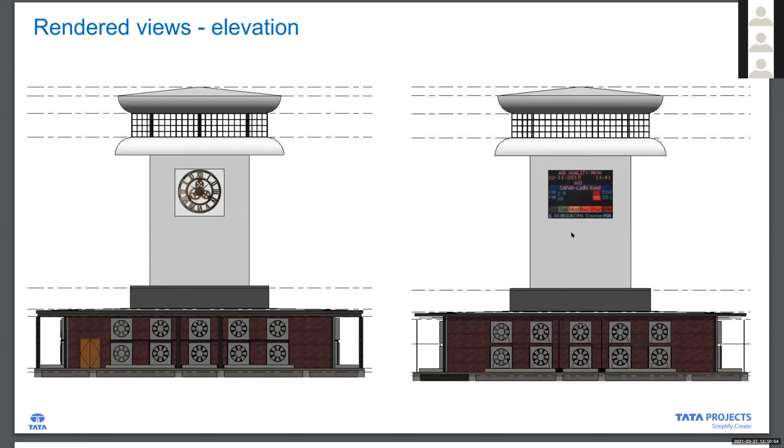On the left hand side you see the rendered view - the fans are visible, and there's a clock kind of thing. On the right hand side, the other two sides will have a digital display showing pollutant concentration at the inlet point and outlet point, temperature, humidity - similar to the display at IIT Bombay's gate - so people can see how the air filtration system is working.

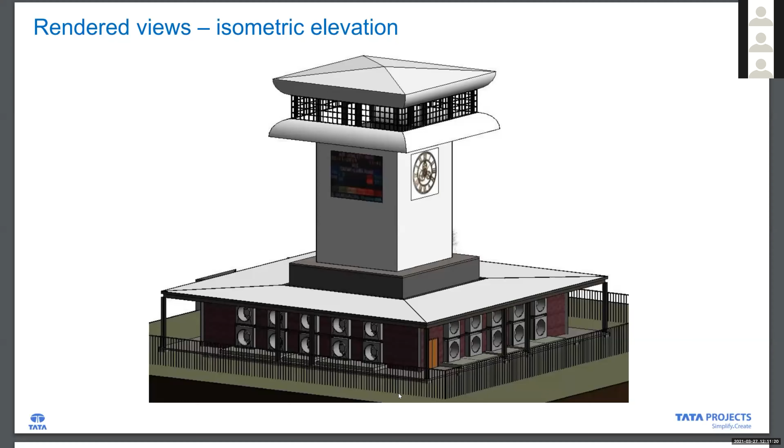This is the isometric view of the same thing, showing how it looks. On top you can see a complete steel structure which will be fabricated off-site, and with a crane we will put the whole thing in place. There are grills so that birds and other things won't go inside, because there will be a lot of airflow suction from the top.

There is a huge power requirement to run this, all the fans. So there is a power requirement, and there is fencing all around because so many fans will be running, so it should be protected from the public. And this fencing we are doing not to obstruct the airflow also, considering this in mind.

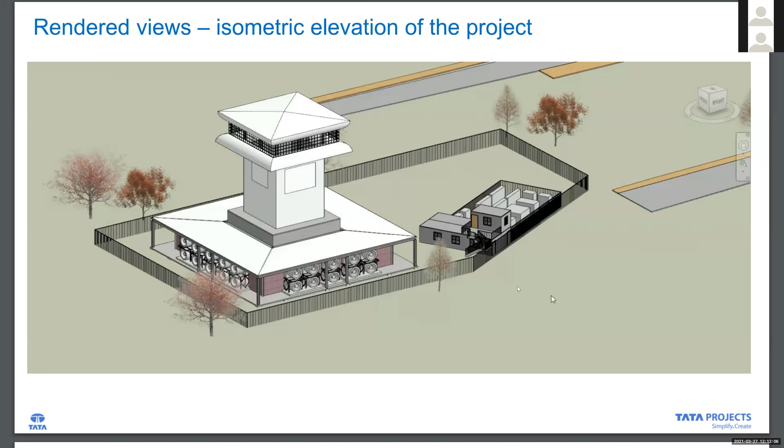Yeah, so hopefully, in another 3-4 months time, in Delhi or in the newspaper, you can see what you are seeing on the screen today. Next, please.

Yeah, so that is, I think, the final slide. So it's a unique project, industry academia collaboration. So you see that there is a scientific concept, and this concept comes through the Tata Projects engineering team, and we have actually drawn it to a reality. And now the construction is ongoing, and there's a huge amount of interface between different stakeholders and disciplines. And then this is a good example of a POC, proof of concept, now implemented at actual scale.

So we understand from professors' presentation that huge parametric studies and particle monitoring will be done with these models, along with the model from the data available from this cleaning system. And it will give good understanding of efficiency of such system in various climatic conditions.

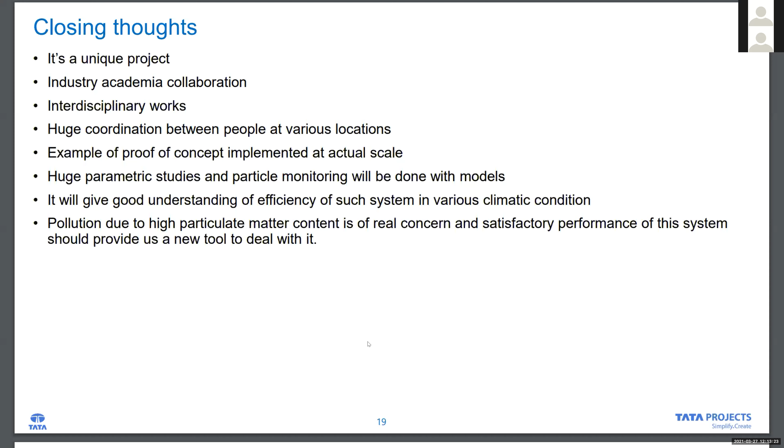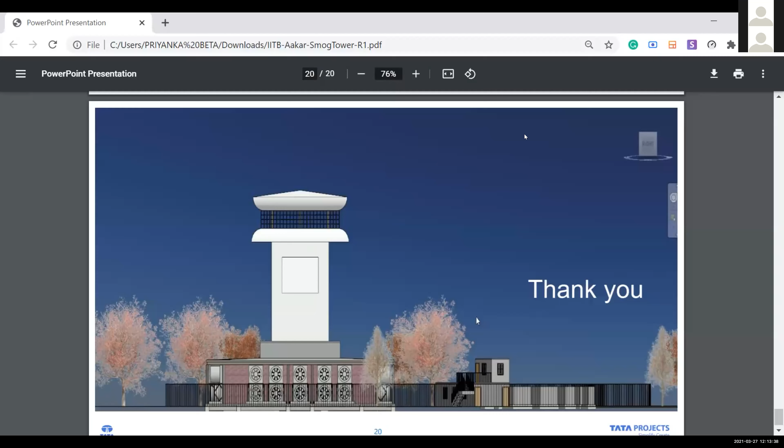And the pollution due to high particulate matter content is of real concern. We all know that in Delhi, Gurgaon, people are now thinking of living elsewhere because of this problem. And the satisfactory performance of this system should provide us a new tool to deal with it. From Tata Project side, we are very excited and very privileged to have this opportunity to build something which will give a very good impact to our society and will deal with a current burning problem.

And this is another view, and thank you. Over to the organizer, and thank you all for patient hearing.

Yeah, thank you, sir. Thank you, Mr. Somnath, sir, and all the students present here. Really, in today's time, I think pollution has been a major reason why we are facing such health issues, especially in areas like Delhi. We can also confirm that India has the most number of polluted cities. So the need of a smog control tower in today's time, I think we should go forward and support this idea suggested by Tata Projects and the different colleges associated with it, along with IIT Bombay and University of Minnesota. I thank all the presenters for taking out time, making such beautiful presentations, which was very difficult in such a span of time.

And also, we have not only known about what a smog tower is, but also got a holistic overview about its technicalities and its requirement in today's time. So I would like to thank each and every presenter, and also the other supporters from Tata Projects, that is Deepanjali, who has been constantly supporting me. Thank you one and all.